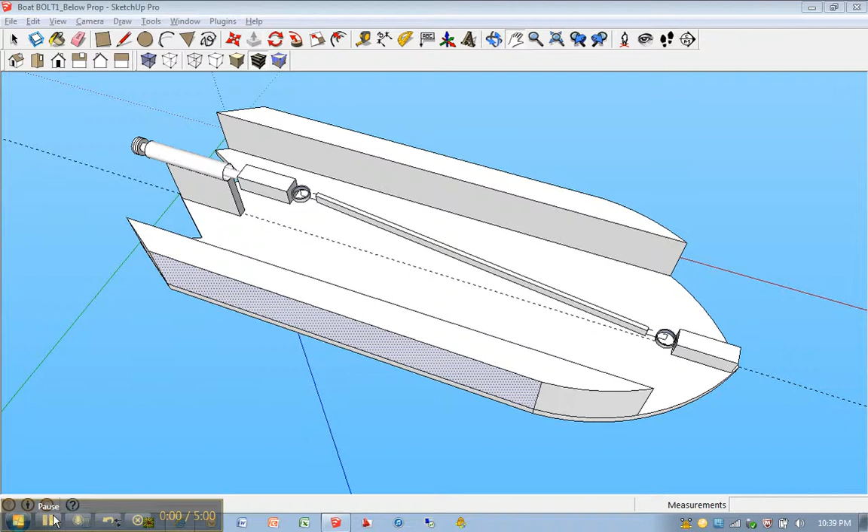Okay, we're going to go ahead and draw the propeller for the below water propulsion boat. So I'm going to rotate and look at this more from the back. I'll use the hand tool, that's H, and move over a little bit. I'm going to draw this somewhere over here off to the side, as long as you're away from the boat that's fine.

I'm going to hit C for circle. You want to make sure you see a red circle appear on your screen. Click once, move away from that point, and type in 1/4 - this part of your propeller actually has a 1/2 inch diameter.

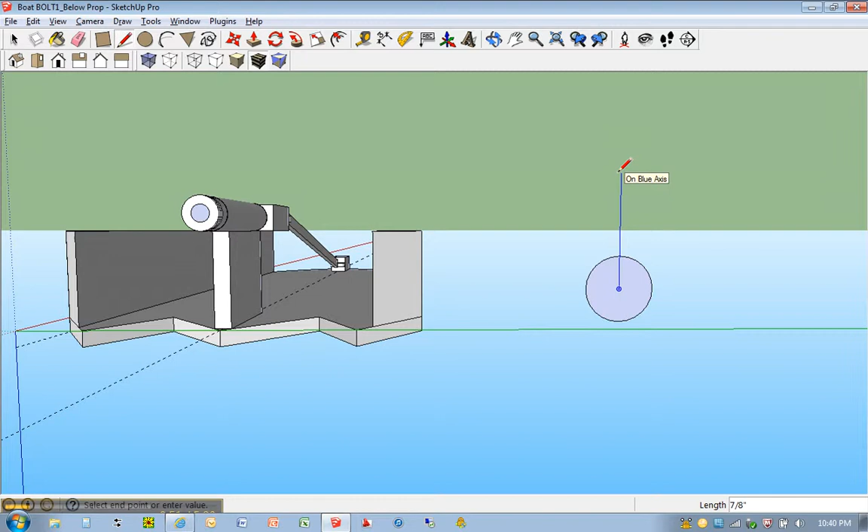I'm going to go ahead and hit L for line, and I want you to find the center. Click once, I want you to come straight up, and you should see a blue line appear. Type in 1 for 1 inch. If you recall, your propellers were 1 inch long from center.

Now I want you to move either to the right or to the left, doesn't matter, and type in 3/16. Make sure you see a green line. Type in 3/16, hit enter, and now come right back to center.

Okay, let's go ahead and click on this point here. Still using the line tool, move away. Once again, you should see a green line appear. Type in 3/16, and then move back to center.

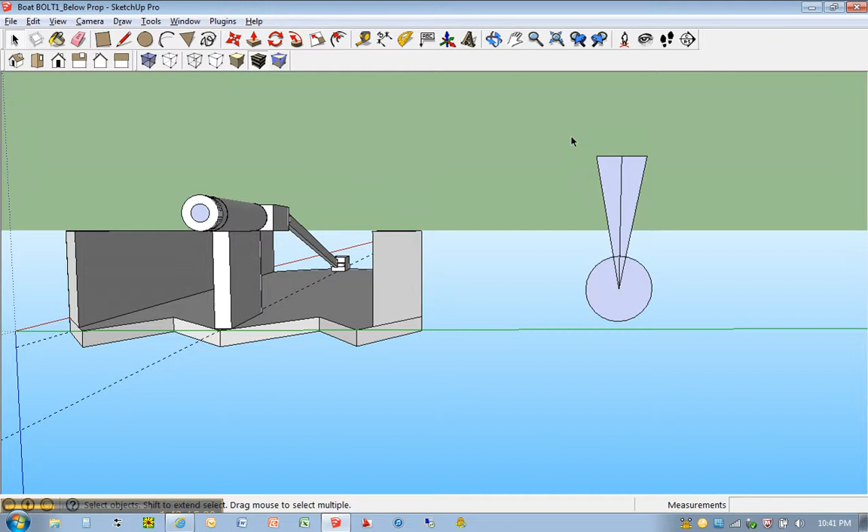Okay, we're going to take this propeller and duplicate it 2 more times. First select by selecting the arrow tool or pressing the spacebar on your keyboard, and watch carefully how I select this. I'm going to click, drag, and put a box only around the actual blade. You do not have to also include the circle.

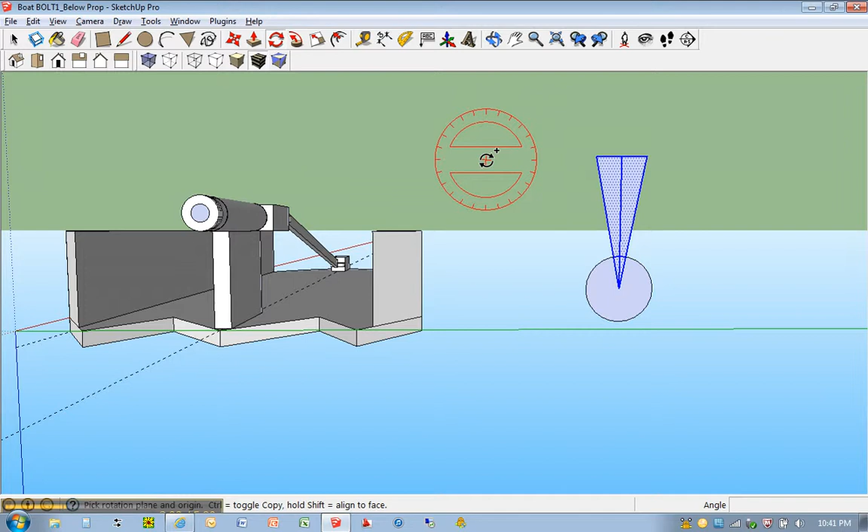I'm going to go ahead and select the rotate tool. What I want you to do is select the control key by striking it 1 time. You should see a plus symbol appear next to the rotate tool. We're going to click once in the center, and then really I can click anywhere along this blade - I'll click right here at the top. Click a 2nd time.

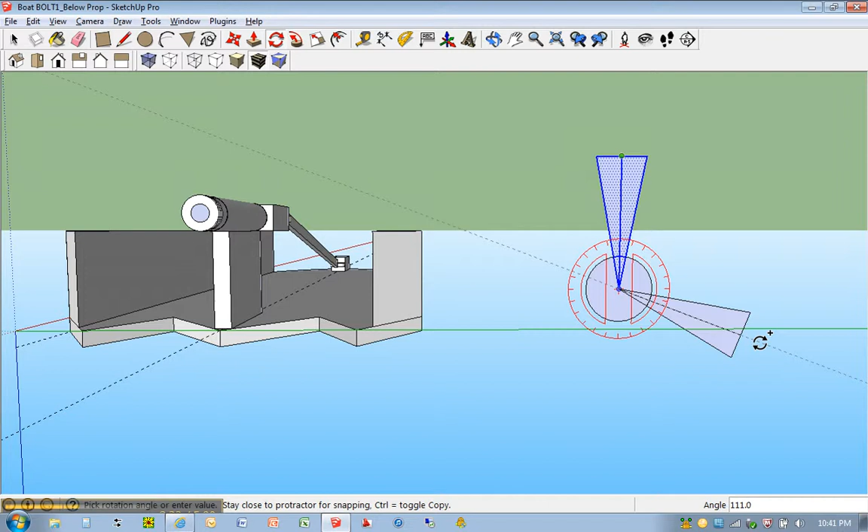Move away from the blade. You'll notice there's some numbers that appear in the bottom right hand corner. I want you to type in 120, and hit enter.

Okay, go ahead once again and hit the control key. If you don't hit the control key, this will not work properly. You should always see a plus symbol appear next to the rotation tool. Once again click at the center point, click once, and then click a 2nd time anywhere along this line - I'll click right here at the end where it says endpoint. Click a 2nd time. Once again, move away and type in 120.

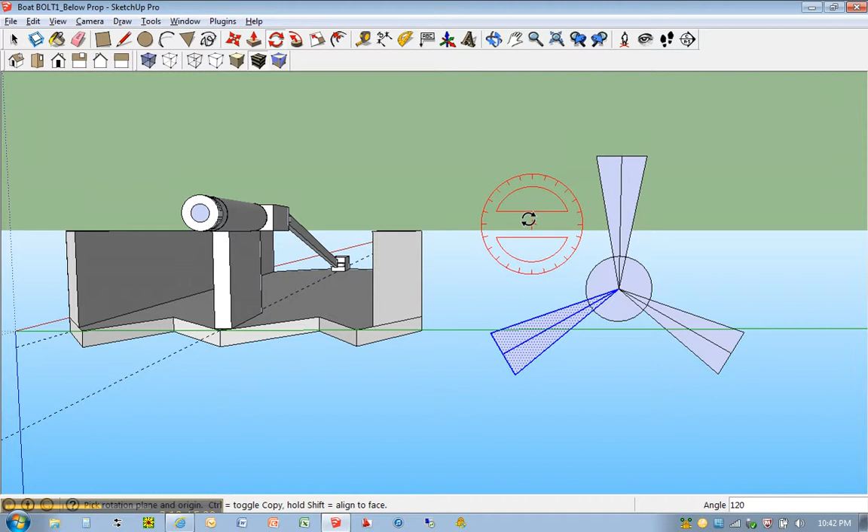So with the control key selected when we're using rotate, we're basically duplicating, copying, as well as rotating at the same time. Okay, I'm going to go ahead and hit E for eraser, and I'm going to erase some of this information.

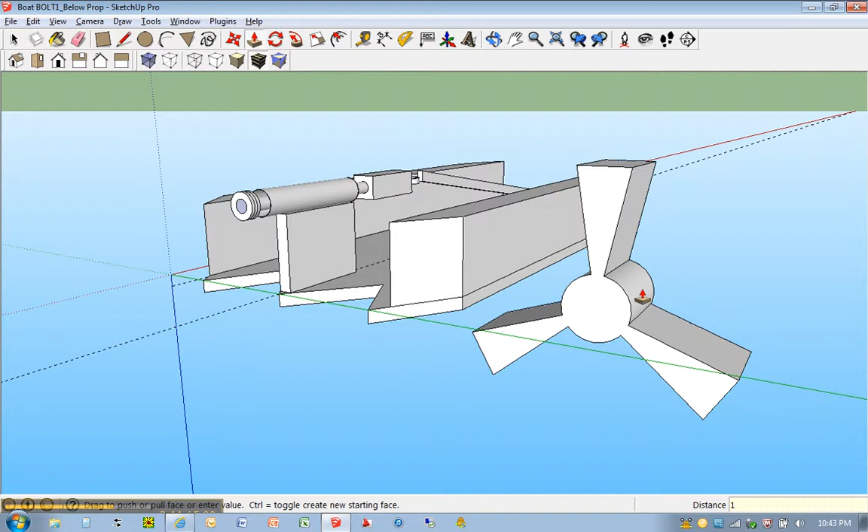I'm going to do a slight rotation and hit P for push-pull. I'm going to click once anywhere on this propeller, move away and type in 1/8 for 1/8 of an inch, and then hit enter. At this point, it's basically going to be a matter of moving this propeller onto the back here.

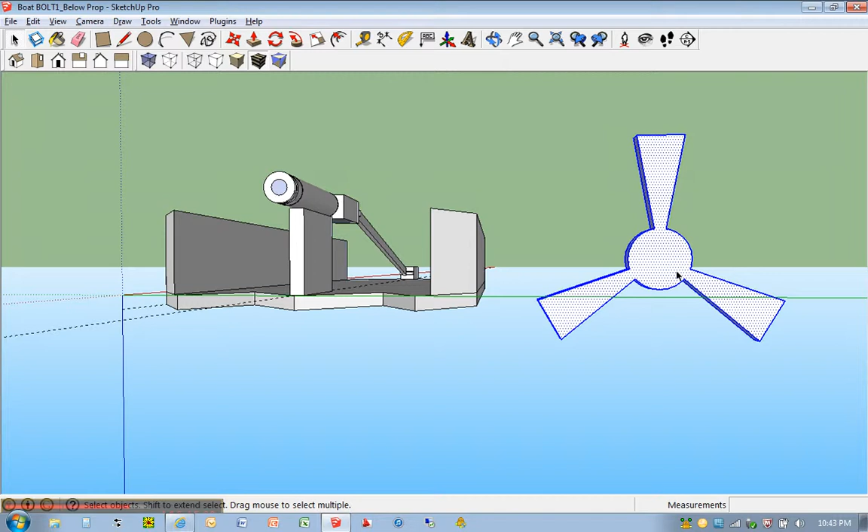One thing I'd recommend you do is click on your arrow tool or select tool, spacebar, and I would recommend you group this object so that when you move it, the whole thing moves. Just click and drag, put a big box around the propeller. Make sure none of your boat gets selected - just put a box only around the propeller. Right click on it and select the option Make Group. By making it a group, it is now all one entity.

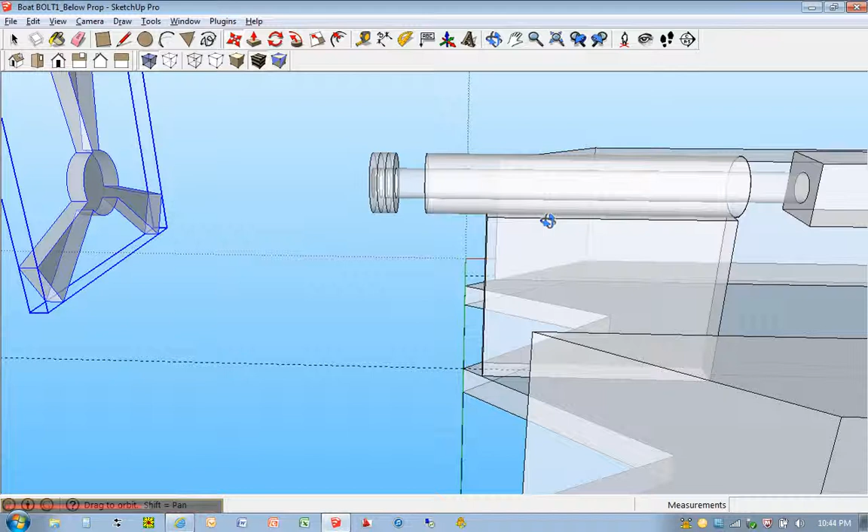One thing we talked about in class was using the X-ray tool, using the Move tool, and using this to position it on the propulsion system. Once again, this is going to take a little bit of time and practice to get it right where you want it, but with a little bit of time and practice, you'll get it right where you need it. I'm sure you can do a better job than this, so just keep at it and you'll get it. Save your work.